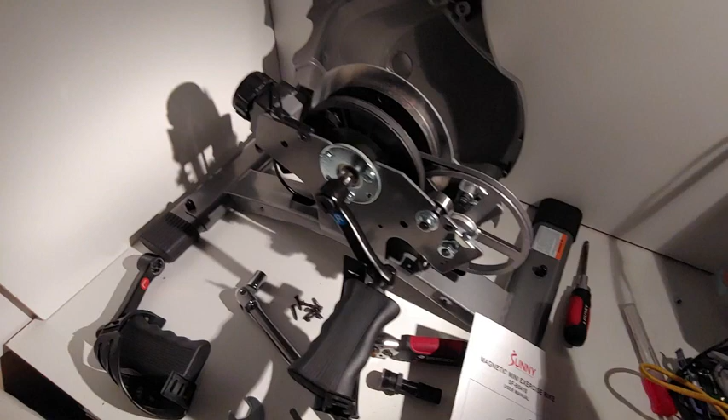Hey guys, thought I'd do a quick review on the Sunny SF-B0418 Magnetic Mini Exercise Bike.

So I decided to get this one over many other cheaper devices off of Amazon due to the magnetic resistance system, as opposed to other ones that do tension either via just a bolt that presses down, or some sort of strap that just adds tension. These produce a much better experience.

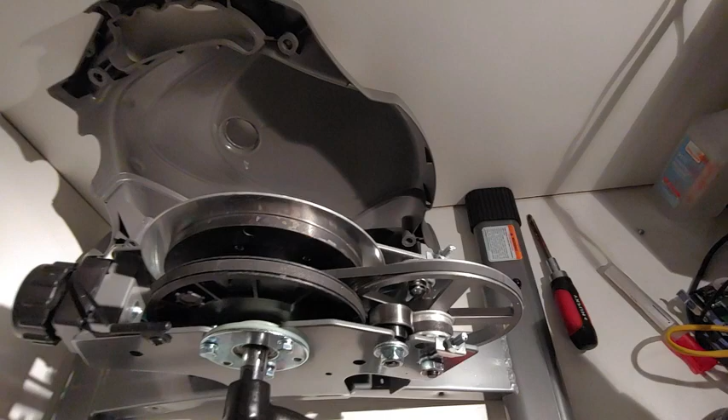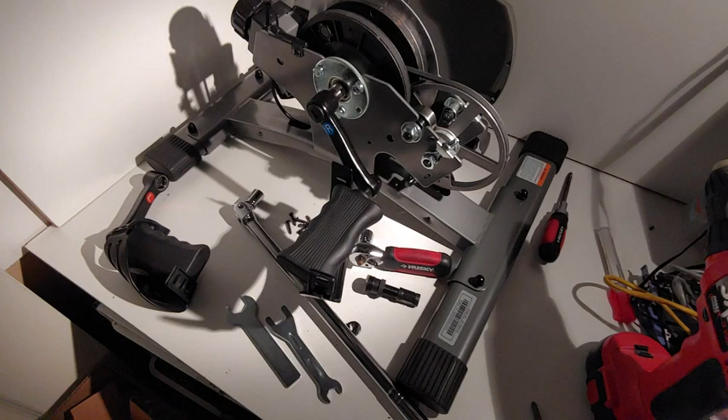That said, I bought mine off of the Amazon warehouse deals for a couple bucks off. Figured something like this shouldn't really have any problems, but I did run into one issue that hopefully this video will help with. I also want to comment on build quality.

A couple other reviewers made some comments about build quality of the device. Now, once you have the plastic shell off, which is an ABS shell, I don't think you're going to find any real problems with build quality on this thing. If I can turn on my light, we got a solid steel welded frame here. Everything inside is extremely tight, very good tolerances. Everything is buttery smooth. It's great.

I don't think there's any merit to a build quality issue. Maybe some people have some QC trouble, I'm not sure. Now, on to my particular issue.

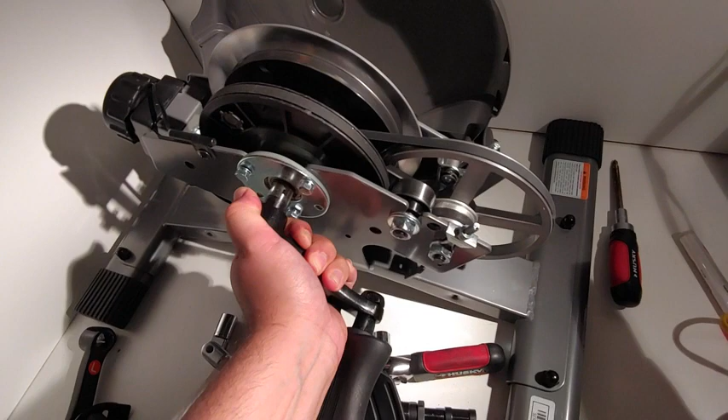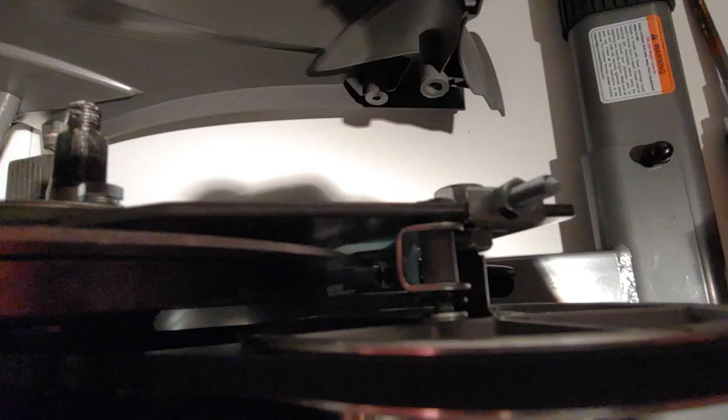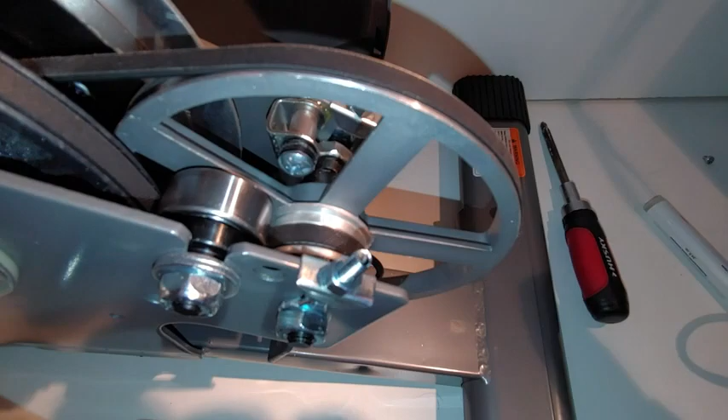I actually had a problem where just once I got the thing together, I gave it some movement, and literally within a couple degrees of movement here, it runs into a stop. Now, with the machine open, you can see exactly what's going on. And that is this little armature mechanism here that moves the magnet in and out. This little mounting screw here is actually sticking out enough to where it interacts with the spokes here.

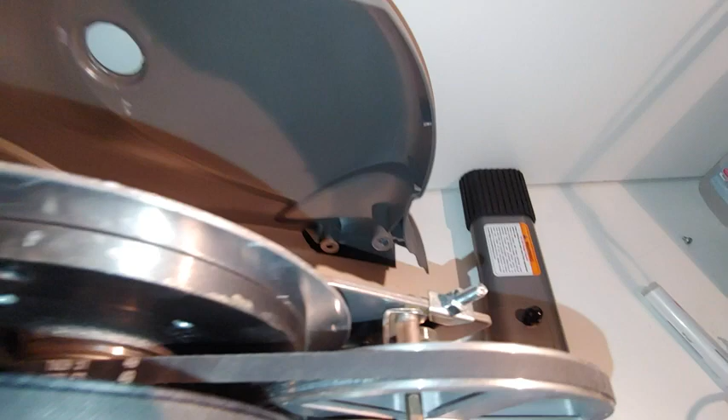So this, as far as repairing it once you actually get it out, is pretty simple. Give you a little hole to take care of that with. Now, I'll probably put some Loctite on this. Don't over tighten it, because that will actually prevent its movement in and out. But cinch that down, make sure your arm still moves freely, and there you have it.

It's really smooth. So again, build quality and function of the unit, it's really excellent. Some of the other things people were talking about having problems with is the pedals coming off. I'm not sure if anybody had an issue with the crank, but I'll get to that in a second.

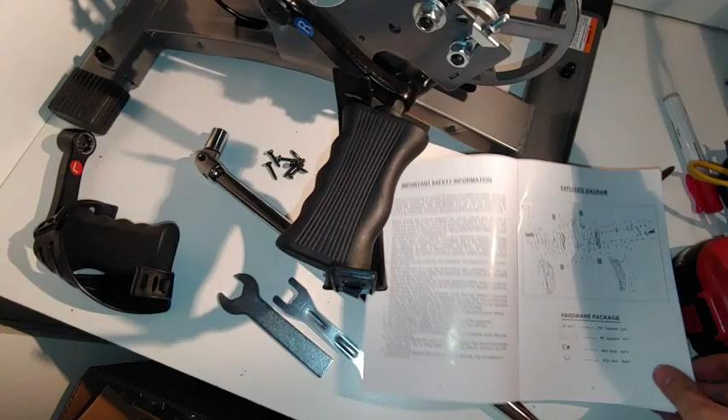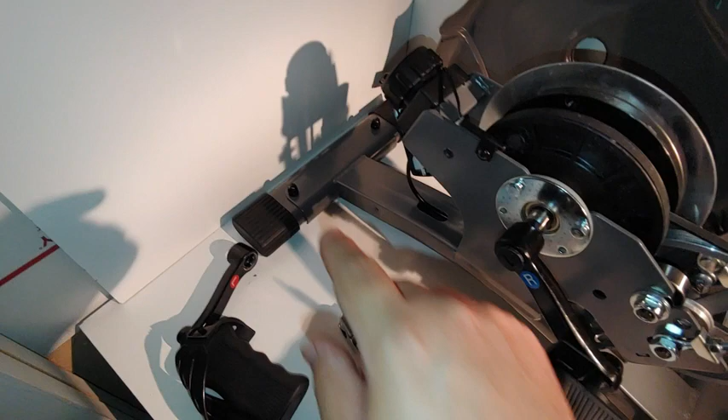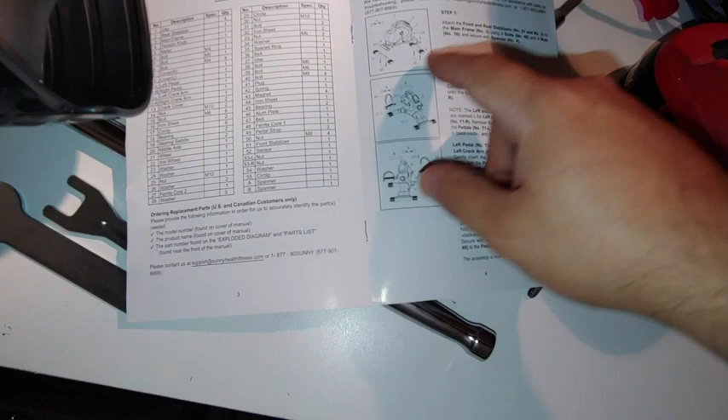As far as the pedals go, make sure you install them correctly. The instructions, while a bit cryptic, if we look at the manual here, there is quite some language telling you which parts to use. And really, during assembly, everything comes together except for the two legs there, the bolts that hold those together, and then the pedals onto the cranks. The cranks come assembled and everything. So most of these parts and instructions here, you're only really addressing 5 or 6 parts.

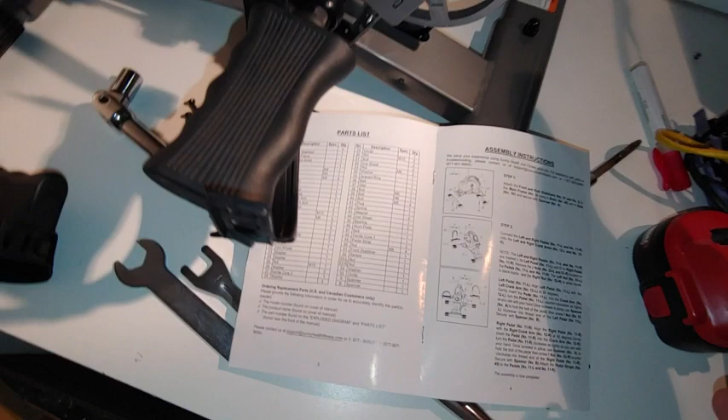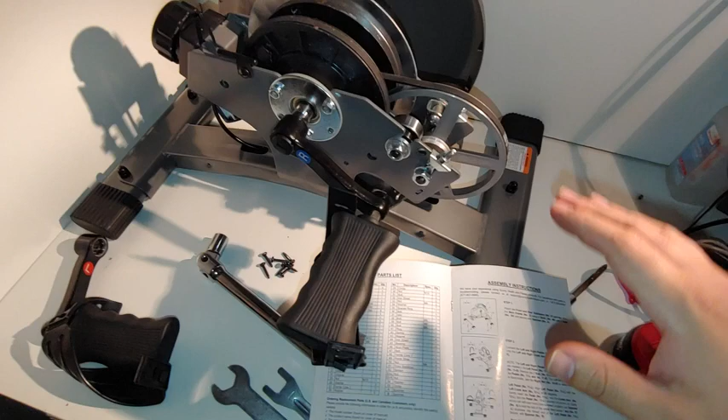So it's a little bit confusing for some folks to probably go through these instructions, but if you're careful, it's pretty straightforward. There's not much to mess up in assembly except for left and right side. Very important, the left side, I believe, is reverse thread. That way, when you're pedaling normally, you're not going to start backing out those threads. So make sure you get the correct side as far as the pedals go for installation. You have to get that right.

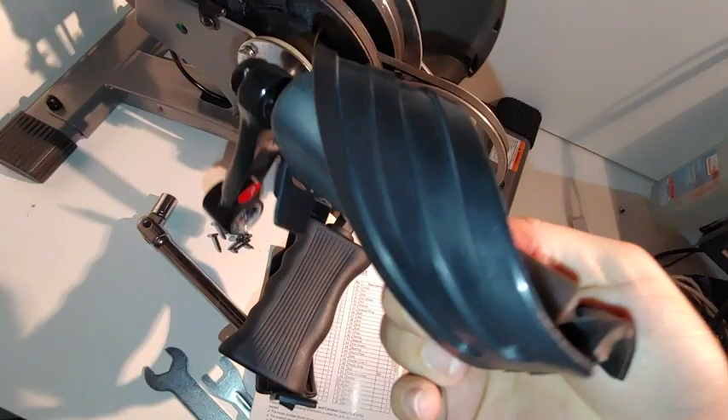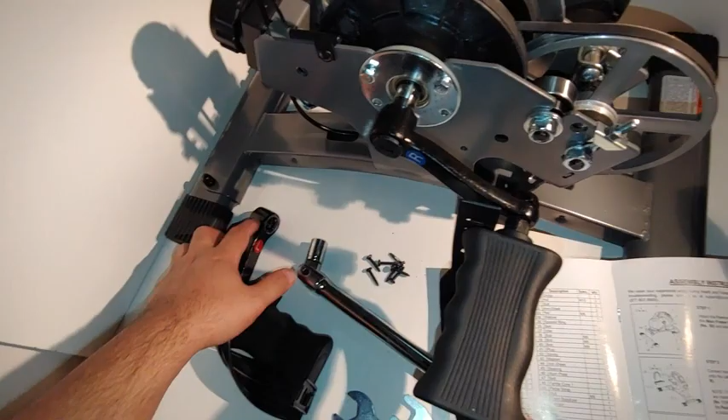They're labeled. We have the left side here, even the pedal itself labeled, and there's a difference in the nut that you install. The reverse thread nut, I believe, has the white side, or vice versa. Just check the note that's in there. There's even an additional card and another document that gives you a warning.

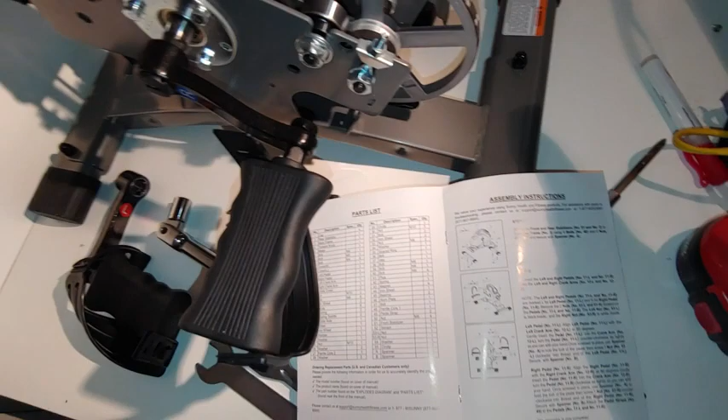Install them correctly, and if you install it on the wrong side, don't cross thread them. Just the biggest cautions: install them on the correct side. Do not cross thread anything. Very important.

As far as the build quality of the machine itself, like I said, it's excellent. The usability, excellent. Buttery smooth mechanism. The resistance is terrific on it. It's really surprising what just movement of that little armature in there would do as far as resistance.

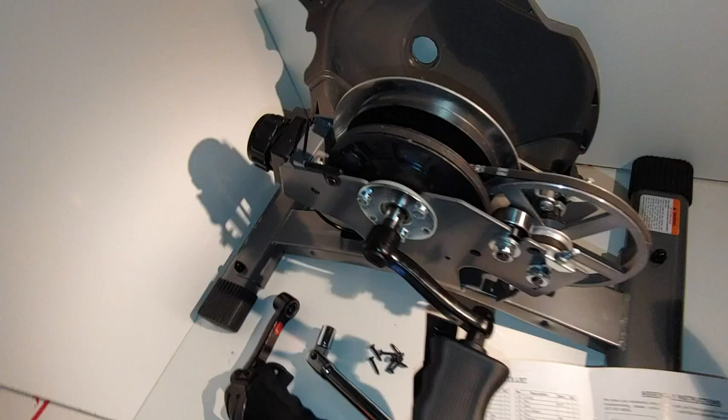There's discernible differences between each of the 8 levels on there, from 1 was nothing with the magnet completely disengaged, all the way up. Each level definitely provides a noticeable, discernible increase in resistance as you go up the scale, all the way up to 8. It's terrific, really. Very impressed with this gadget here.

Now, as far as getting it down to this level, should you have a problem, I just want to give a quick note. So this plastic case, in order to remove it, you do have to remove the cranks. And in order to remove the cranks, you do need some tools. Don't even mess around. Have the right tools. Any bicycle shop should probably have the right equipment for you.

In this case, so to get the crank off, you got the plastic cap. Remove the nut. You will need a socket to do this, and then your crank will still be on there. You need a crank puller tool like this one. This particular one is from Park Tool. You would install this and back it all the way in as far as you can go, and then crank that down, and that will gradually pull your crank off.

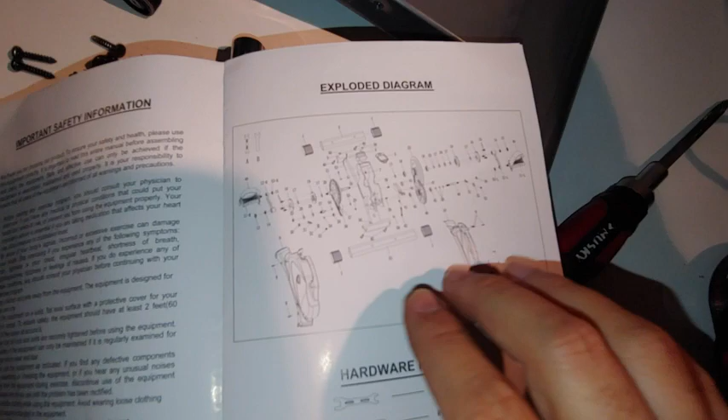There's plenty of instructions on YouTube on removal and installation of cranks for bicycles, as well as tips and parts that you need. Once you get both sides of those cranks off, you simply remove these screws from either side. The plastic casing comes off, and you have access to everything in here. The instructions that it comes with also give you a very detailed exploded diagram of everything that's in there and how it all comes together, and a parts list.

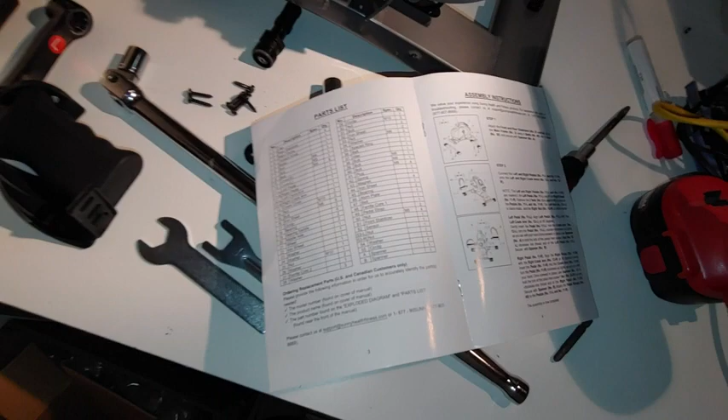They also sell parts, which is fantastic. I think a lot of people were using that as some sort of downside. I guess they were pushed to buy parts to fix their machine. I think it's fantastic that they offer you the ability to buy individual parts to keep the thing running without having to buy an entire new unit.

Like I said, my observation of the thing is that it's built solidly. I think if you take care of it, you should be good, and just know that the manufacturer does have parts should you need them. I think that's fantastic.

One thing to note, maybe some people have some confusion as to the warranty. I believe it has a 1-year warranty that covers the frame, and that is all the welding and actual structural work that's in here. And I think the internals, guts, parts and everything are covered by a 90-day warranty, which I think is fair. Just make sure your machine is working okay and everything's in check, and make sure you build it correctly, and you really should be good to go. This thing is solid. It's going to last you years.

That's about all I have to say. I definitely give this thing a 5-star recommendation on my end, despite this little issue that I had, but I don't know if this was out the gate from the manufacturer or something, maybe with just the original buyer. But hey, it's a machine. Keep up with it. If it's broken, you can fix it. It's excellent.